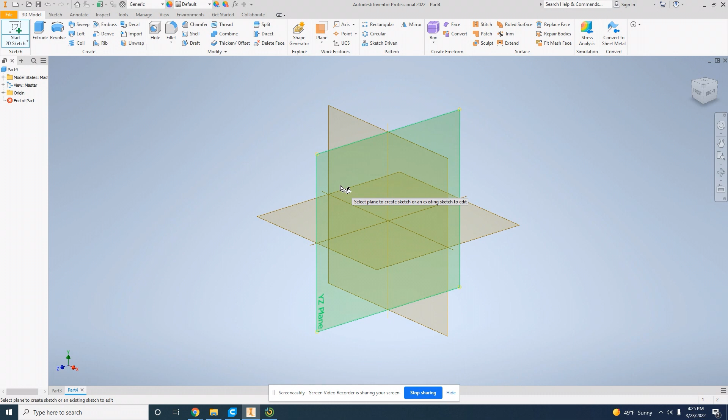Coming up here, I can click 2D sketch. And then I'm given a series of planes. This is just like in math class where you have an X and Y, Y and Z plane. You can choose any plane you want. It's not really going to matter for this. I select the plane by clicking it.

Now I'm taken into a place where I can draw. If I look at it from the side, I can see that this is two-dimensional. There is one axis here and one axis here.

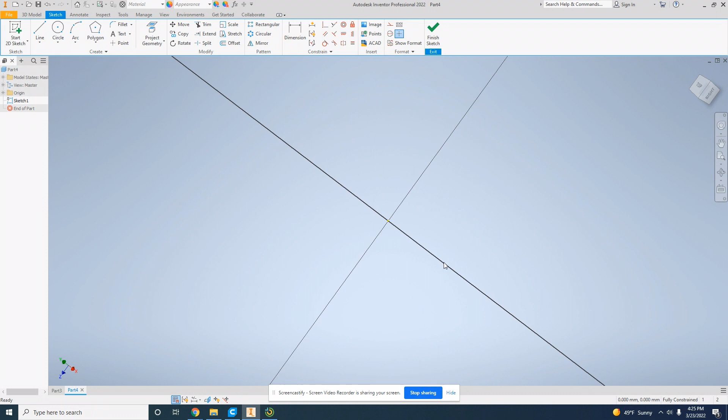I can navigate around by clicking this navigation cube in the corner. I can click and drag and hold it to look around, or I can click one of the words to see it. I don't want to change my view too much because this is actually the view I want to draw in.

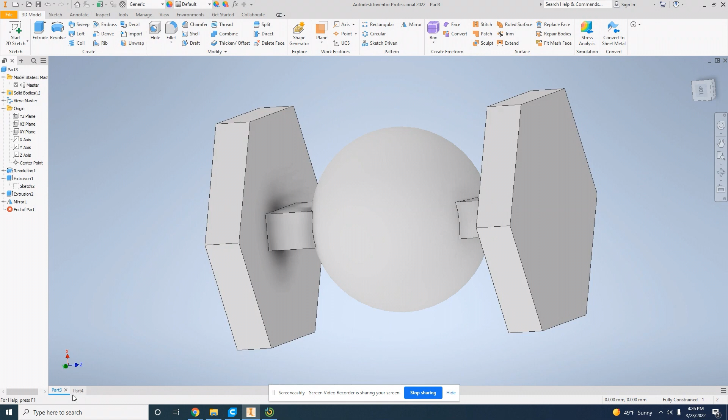First thing I'm going to draw is the circle in the middle of the TIE fighter. That is this part right here, kind of the cockpit. I'm going to click circle, and then I'm going to click in the middle of my design.

And then I'm going to move my mouse again. I don't have to hold my mouse. It's waiting for me to either type in a dimension or click again. We're not going to worry so much about the dimensions for this part. So I'm just going to drag it till I like it, and I'm going to click again, and now it's there.

There's one more thing I need to draw, and that is a line. I'm going to click line, and I want it to perfectly cut my circle in half. Because I started drawing my circle at the origin, that's easy to do. I just come over to one of my axis lines, click on it where it meets the circle, draw across, and when it meets the other side, it will click into place along the other axis and along the other edge of the circle. And I can click again. That's everything I need for this first sketch. So I can come up here and click Finish Sketch.

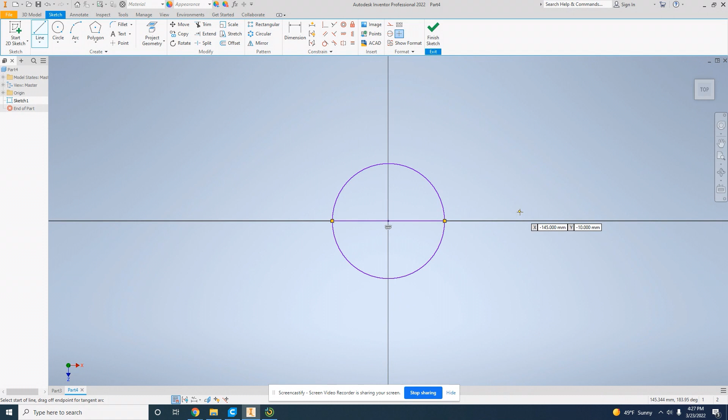My picture is really zoomed in. I'm going to use the mouse wheel to zoom out. The mouse wheel zoom is a little bit weird - it's going to zoom wherever your mouse is pointed.

If I point my mouse on this corner and I zoom in, it zooms on this corner. If I want to zoom on the other corner, I need to move my mouse over there and then zoom in. It's a little counterintuitive at first, but once you're used to pointing where you want to zoom, it's pretty easy.

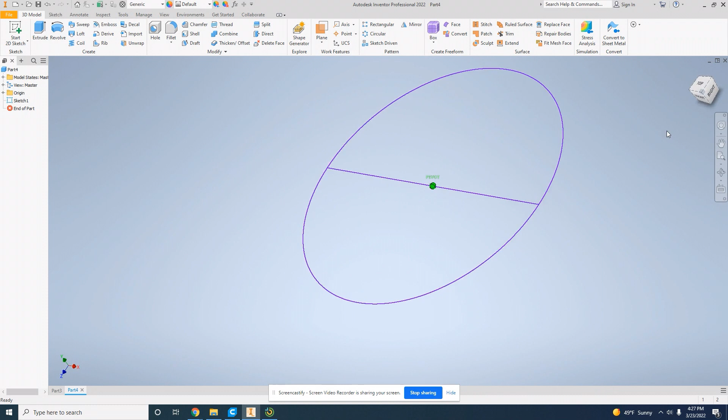If I want to look at this from a few angles, I can click my navigation cube in the right corner, and I can move it around. And now I can see my sketch from all sorts of different angles. Notice that it's two-dimensional, like it's drawn on a piece of paper.

I'm going to get a nice view of the top of it, and now it's time to turn this sketch, this 2D object, into 3D. And for that, I'm going to use the Revolve tool. I click Revolve, and then a menu pops up. And there's a few things I have to set in this menu.

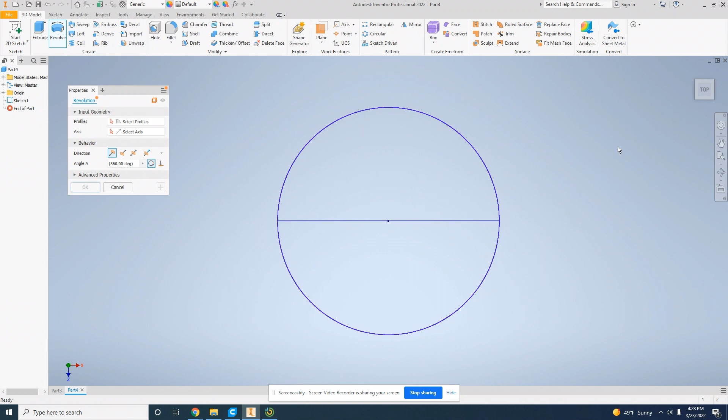The first thing is I have to select what part of my 2D drawing I want to make 3D. I'm going to click the Select Profiles button, and I'm going to move it around. I only need half of my circle. In fact, if I select my whole circle, it won't work. So I'm going to make sure I only have half my circle. If you're getting your whole circle, try moving your mouse in or zooming in. All right, I click to select my half circle.

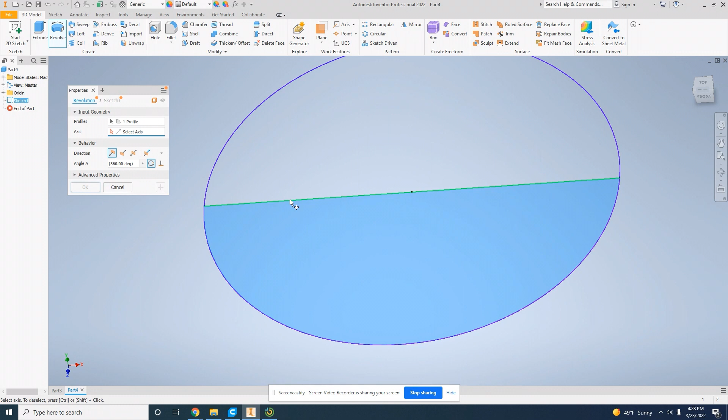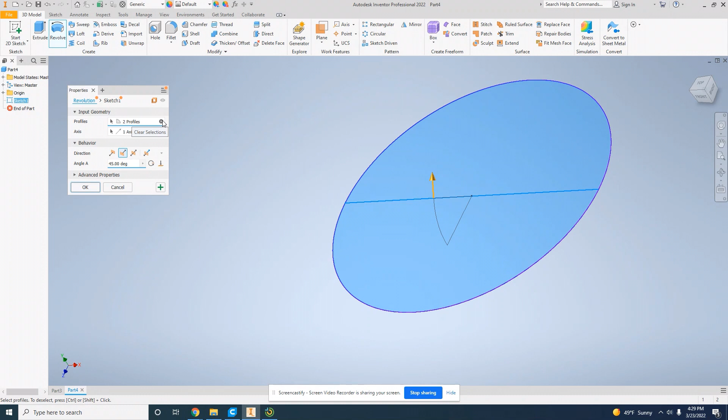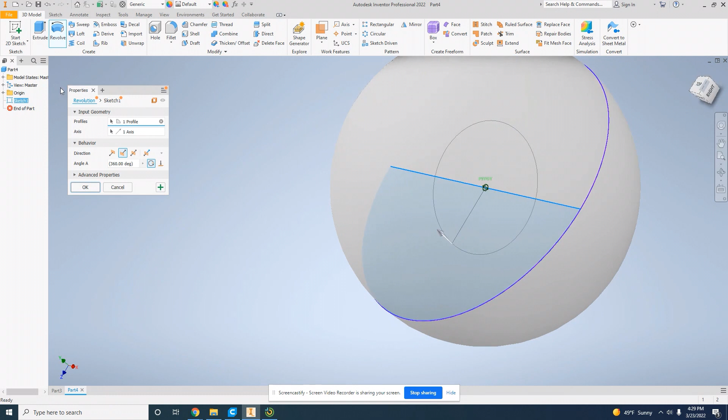See, I accidentally clicked my second profile there. If this happens to you and your drawing disappears, clear the selections and select just one profile again. I could click and drag this arrow until I have as much of my circle as I want, or there's a button for that down here for full. Once I have my circle drawn and it's now fully revolved around, I'm going to say OK.

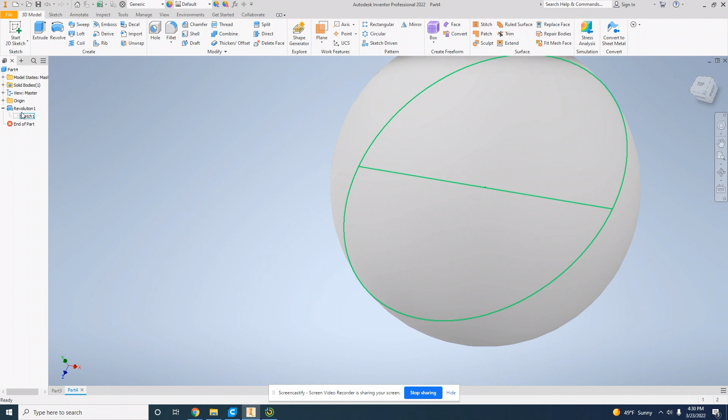And over here on the left, this is our part navigator. There's a few things going on there now. Now there's something called Revolution 1. If I hover over that, a green box appears around the part I just made. If I hit plus next to that, I can hover over the sketch 1, and that is the first drawing I made. Inventor will hide the drawing after you use it because it's been used up. We can modify that drawing later on, but we're going to wait on that for now.

It's now time for me to make the rest of my spaceship. Looking back at my original drawing, I have these two bars coming out of the center cockpit. I need to draw those. Every drawing will start with a 2D sketch. But if I click Start 2D Sketch, there's nowhere for me to click like before.

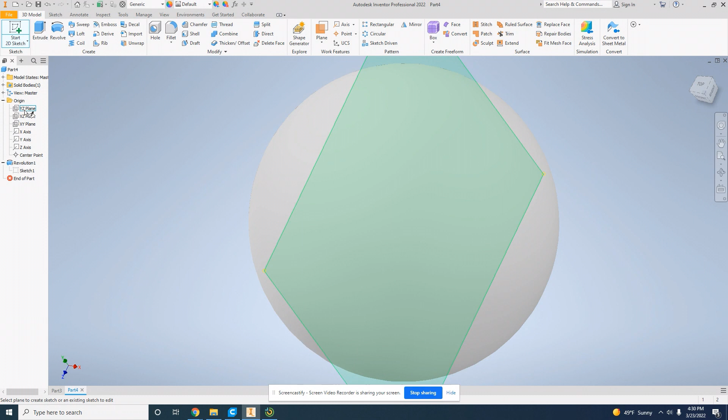Instead, I need to come over here and right in my Parts Navigator. Under Origin, if I click that, I will get a series of origins, and I can hover over them to see which direction. As this is a sphere, and as I made it around the origin, again, it doesn't matter. So I click Start New 2D Sketch, and then I click the plane I want. I am now in another sketch. You know you're in a sketch because the rest of the navigation grays out and it highlights only the sketch you're on.

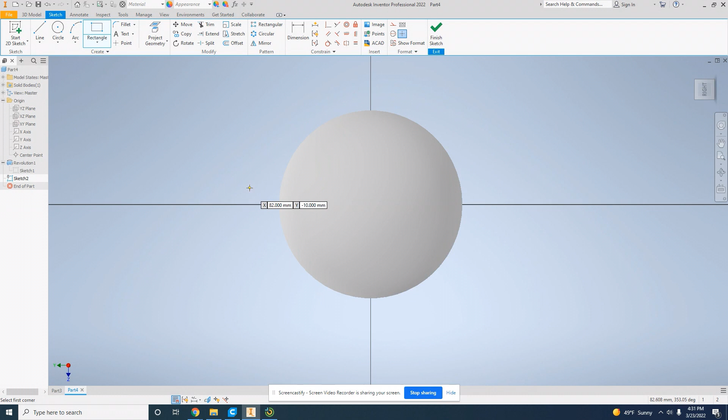I'm going to now use the rectangle tool to draw the new shape that I want to make. The rectangle tool is right up here, and if you can't see it, click the drop down arrow and you can find other ways. I want rectangle 2-point. I'm going to click somewhere about where I think it should be and go across to the other side about where I think it should be.

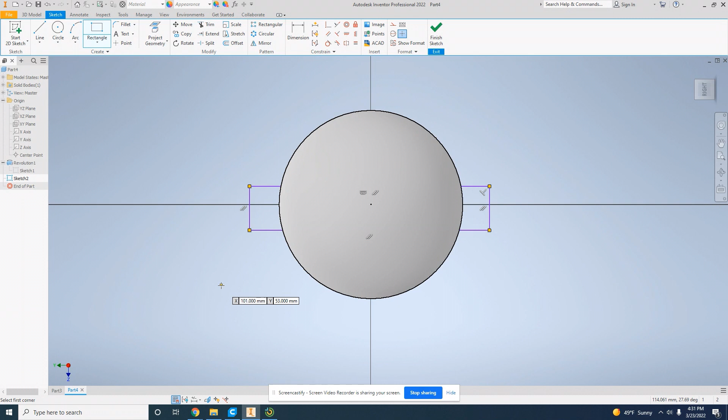You'll notice I'm not measuring too much right now. That's something I could add later, but I don't want to focus too much on measurements in this first video. I'm just going to move stuff till it looks about right. That is everything I need to draw for this next sketch. I can look at it from the side and see that, yes, it is still a 2D sketch. I will click Finish Sketch.

Now that I've finished the sketch, I can click Extrude. Extrude takes a 2D shape and pulls it forward or backward. It's automatically highlighted the square for me that I want it to make because it was such a simple sketch. If it didn't do that, I can click the Select Profiles and then click the profile that I want.

I can now say some different behaviors I want it to do. Do I want it to come this way towards me? Do I want it to go away from me? Do I want it to go on each side? Do I want it to go to one side more than another side? In this case, I want it to go to each side evenly.

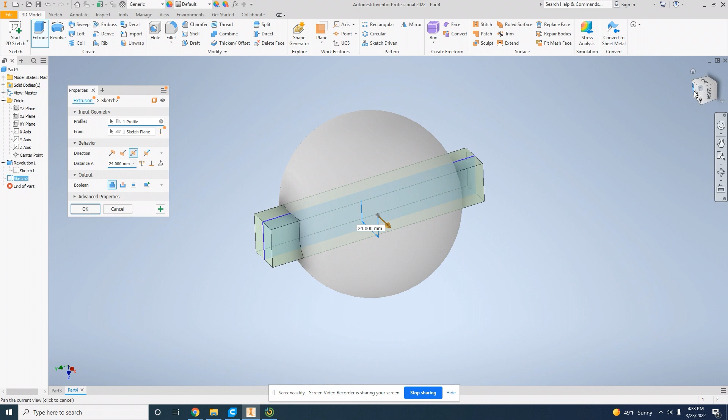And I can pick a number. I can either drag this slider until it's the way I like that it looks, or I could type in a number if I have a number in mind. Since I'm not worrying about numbers, I'm just going to drag it to what I think looks about right. And I can use my navigation cube here to get an idea of what it's going to look like. And I think that looks fantastic. When I'm happy, I will click OK.

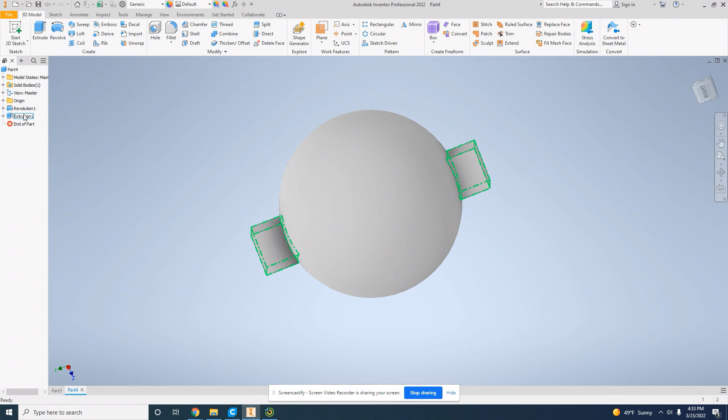Looking over at your part navigator, I'm going to close a few of these, we'll see that now not only do I have a Revolution 1, I have an Extrusion 1. And if I hover over them, again, I can see the glowing to indicate which one I'm using.

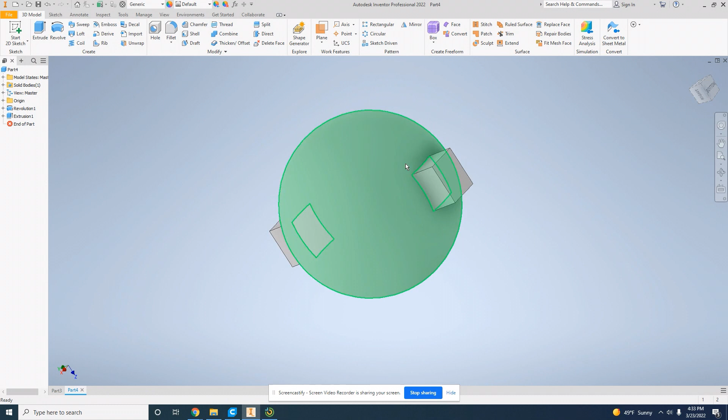The last thing I need to add is these really sweet wings. And to do that, once again, we're going to start with a sketch. I'm going to move my model a little bit so I can see the end because that's where I'm going to attach the wings. I'm going to click Start New 2D Sketch, and then I'm going to click the surface I want the sketch to be on. In this case, I want it to be on the end of that little support material. The camera will navigate around, and now I'm looking at the side of my project.

The shape I want is, I think it's a hexagon. Let's go count the sides. 1, 2, 3, 4, 5, 6. It is in fact a hexagon. Coming back over to my part, in my drawing tools, I have a line, a circle, an arc, and a rectangle. To get a hexagon, I need to click the drop-down arrow on rectangle and look for something called a polygon. Polygon means many sides, and I can choose how many sides I want. I could click in here and I could say 5 sides, but I want 6 sides.

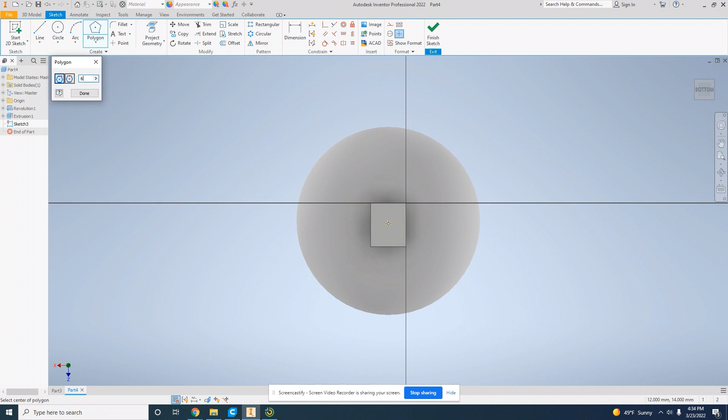Then I come over and I'm going to click on the face of the cube, and I'm going to drag out until it's about the size I want. I think I want it to be a little bit bigger than my cockpit. Once I'm happy with its size, I can click again. Using my navigation cube to look around, that looks pretty good to me. And so I can click Finish Sketch.

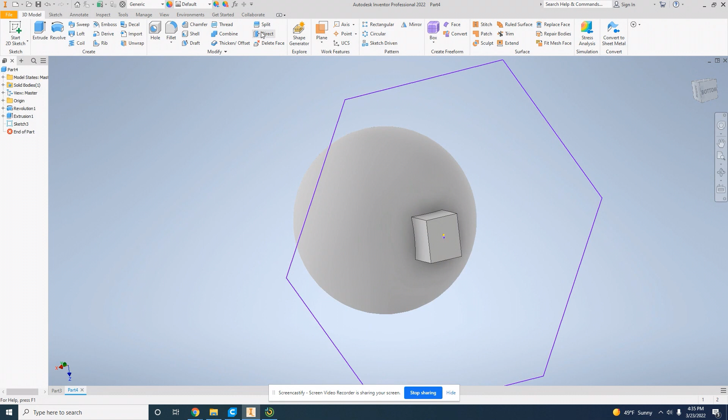All that's left to do is extrude this sketch. And I need to look at my model from a different angle using my navigation cube to decide, is it too big? Is it not big enough? And just by chance, I really like that. I think that's a good look. All right. We now have one wing on a TIE fighter. And that's pretty neat. But there's 2 wings on a TIE fighter.

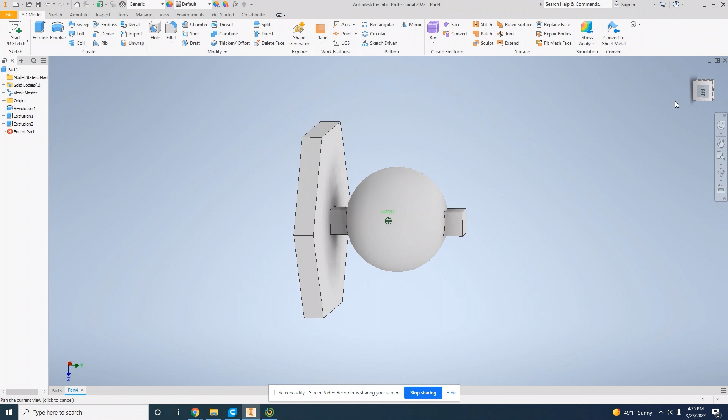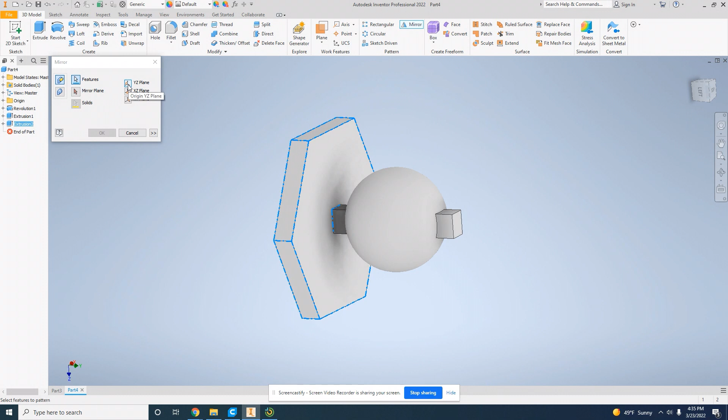We could click Start New 2D Sketch and click the side and make another wing. But there's an easier way. I'm going to use this mirror command right here. By clicking mirror, I first select the feature that I want to mirror, which is this wicked sweet wing. And then I can click these different planes and I'll get a preview of the mirror.

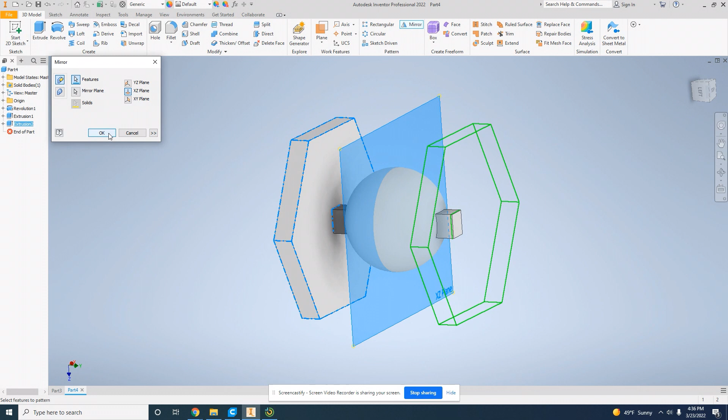All right, so the Y and Z plane doesn't look like a lot's happening. I see a little bit of lines going there. X and Z plane, for me, moves it over to the other side. That's exactly where I want it. So I'm going to say, okay. Now we can look around. This is really neat. I've just made myself a TIE fighter.

If you want to experiment a bit more and try different things, I would love for you to do that. I'm going to include a little bit of other details I might add to this TIE fighter after I'm done talking right now.